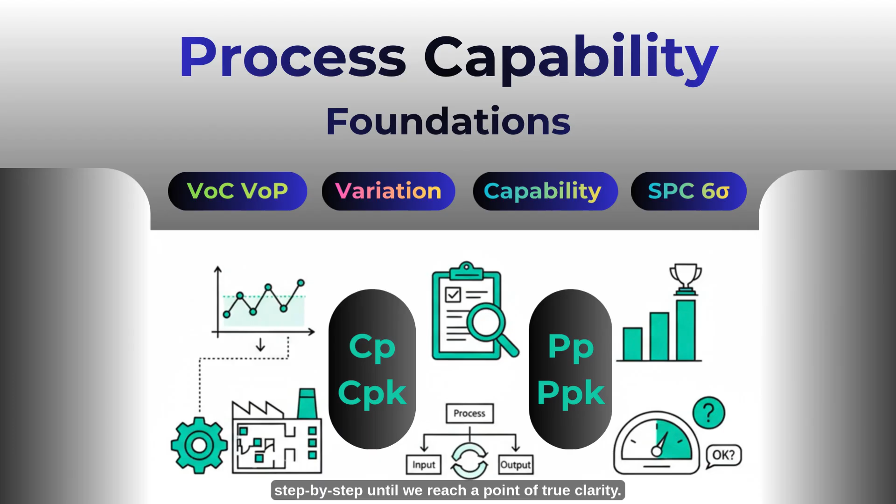This session is designed to be a deep dive, a masterclass, to give you a complete and really confident understanding of process capability. These are the tools that let us measure, understand, and ultimately master that tension. We're going to learn the language of variation and build step by step until we reach a point of true clarity.

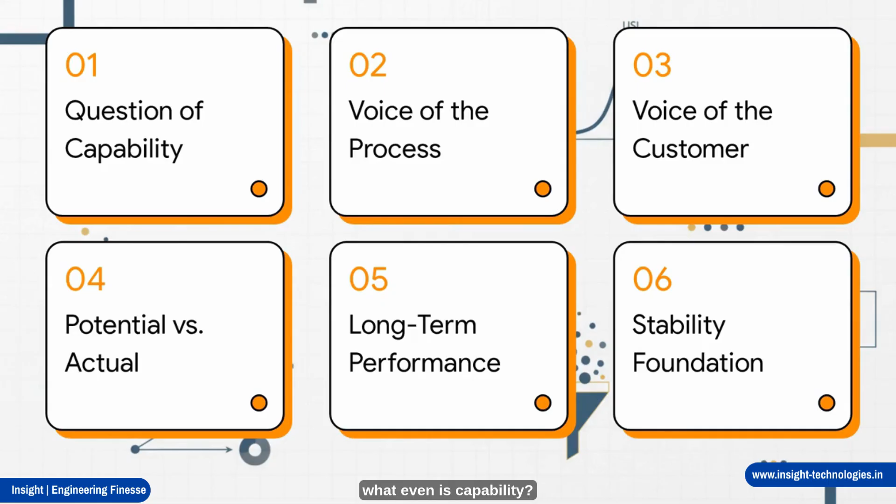Our journey today is structured pretty carefully to build your understanding from the ground up, kind of like constructing a solid building. We'll start with the most basic question: what even is capability? Then we'll introduce two essential perspectives we have to hold in our minds: the voice of the process, what our system is really telling us, and the voice of the customer, what the world is asking of us.

Only then, with that foundation in place, can we start to build on it with our key metrics. We'll learn to tell the difference between a process's potential versus what it's actually doing, and then look at its performance over the long haul. And finally, we're going to secure the whole structure by understanding the one thing that's non-negotiable, the prerequisite that makes all this analysis meaningful in the first place: process stability.

So let's start with that core question. For way too long, a lot of businesses have just run on intuition. We feel like a process is running well. We think we're meeting customer needs. But process capability analysis forces us to ask a much more rigorous, a more honest question.

Is it truly good enough? It's really a method for moving past anecdotes and opinions and into the world of actual statistical proof. It's all about replacing 'I think so' with 'I can prove it.'

Let's think about this in real terms. Whether you're talking about the weight of a cookie, the precise diameter of a screw, or even the time it takes to process an insurance claim, every single thing we produce has a target and it has an acceptable range. The fundamental challenge here is that no process is perfect. You can't produce the exact same result down to the last micron or millisecond every single time. It's just not possible. There will always be some level of natural, inherent variation.

So the critical question isn't, is there variation? Of course there is. The real question is: is the amount of variation in our process small enough to consistently stay inside the boundaries of what our customer expects? This is the exact question that process capability was invented to answer.

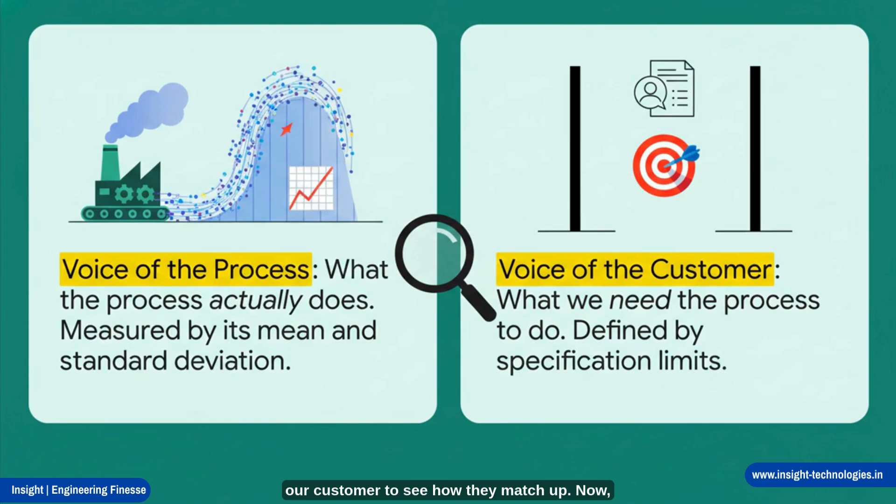Now, it's really tempting to start with what the customer wants, but that's actually a mistake. We have to begin by understanding our own process first. Before we can judge our performance against any external standard, we have to listen really carefully to what the data is telling us. We've got to understand the natural behavior, the inherent rhythm and consistency, or maybe the inconsistency, of what we are doing. This is our first foundational block.

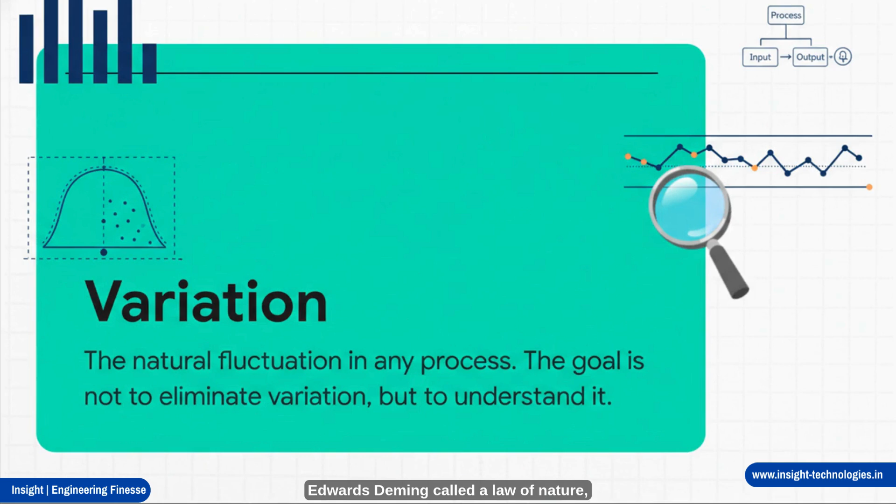The very first thing we just have to accept is what the great quality pioneer W. Edwards Deming called a law of nature: the universal existence of variation. No matter how controlled we think a process is, no two outputs will ever be perfectly, absolutely identical. There will always be tiny, unavoidable fluctuations caused by a million little factors. So our mission isn't the impossible task of eliminating all variation.

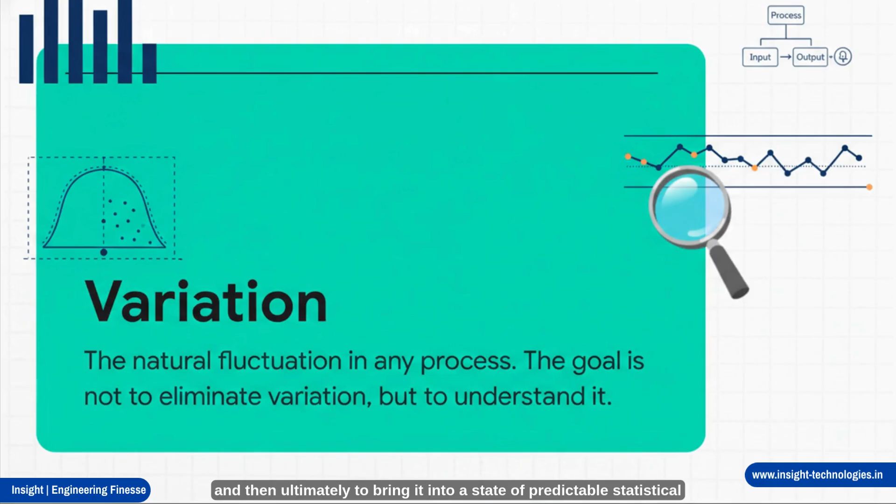No, our mission is to understand its nature and its size, to measure it, and then ultimately to bring it into a state of predictable statistical control, where that variation is consistent and stable over time.

Okay, so if we need to measure this cloud of variation, what language do we use? Well, that language is the standard deviation, often shown by the Greek letter sigma. Now, don't let the name throw you. Conceptually, standard deviation is just a measure of the average distance of each data point from the process average.

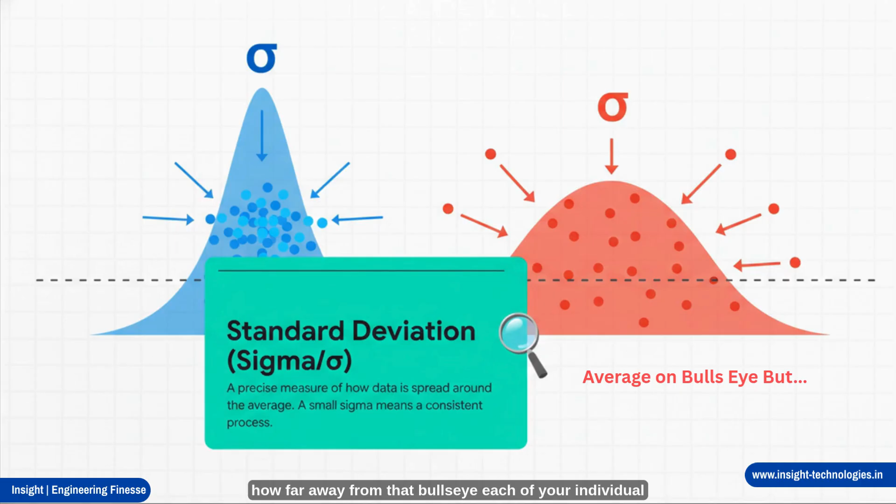Imagine you're throwing darts at a dartboard. The average of all your throws might be right on the bullseye, but the standard deviation tells you, on average, how far away from that bullseye each of your individual darts landed. A small standard deviation, a small sigma, means all your darts are tightly clustered together. That's a consistent, predictable process. A large sigma tells us our darts are scattered all over the board. Our process is wide, it's inconsistent, and it creates a huge range of outcomes.

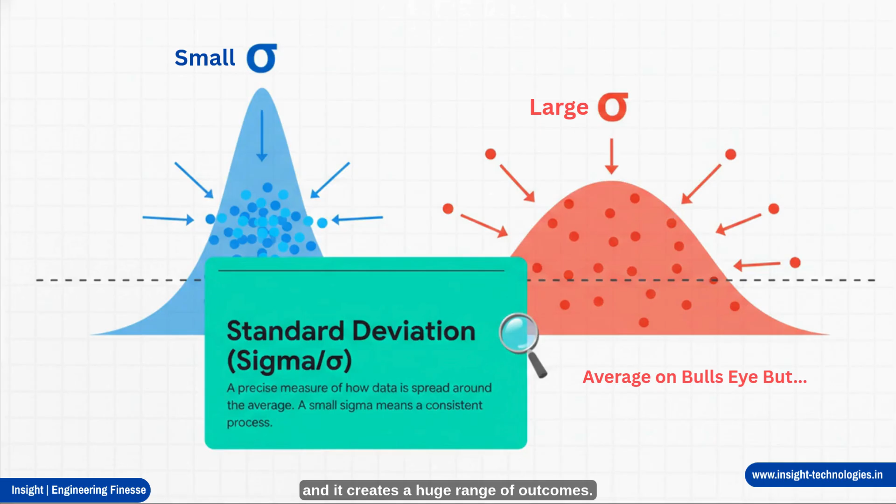Sigma is the single most important number for quantifying the voice of the process. And here is where sigma becomes incredibly powerful. When a process is stable, its output often follows this predictable pattern that we call the normal distribution, that classic bell-shaped curve you see here. The very peak of the curve is our process average, and with sigma, we can make remarkably accurate predictions about this process without having to measure every single item.

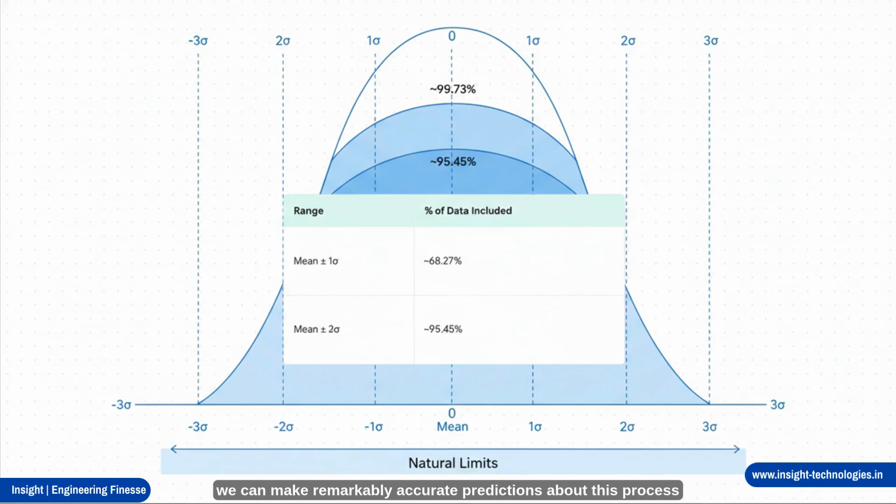We know, as you can see in that first shaded area, that roughly 68% of everything we produce is going to fall within one standard deviation on either side of our average. If we widen our view out to 2 standard deviations, that now contains about 95.5% of our output. And if we go all the way out to 3 standard deviations on each side, we capture a full 99.73% of everything our process makes.

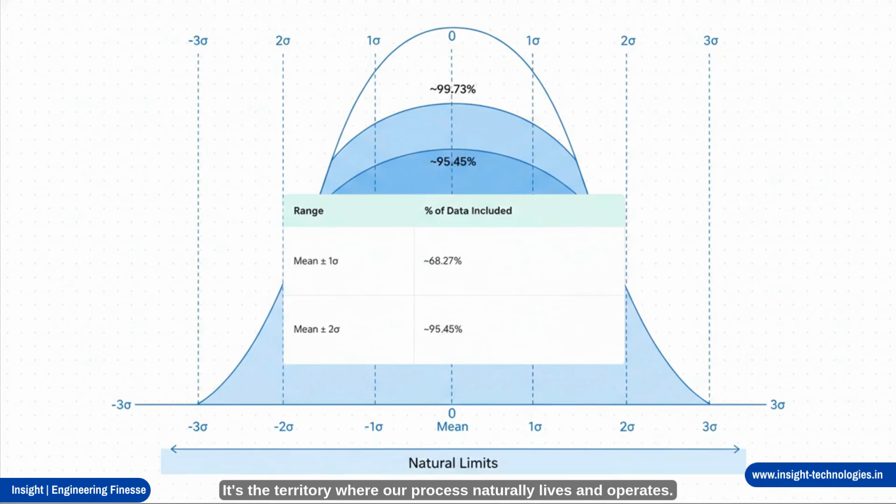This 6 sigma spread, from -3 sigma all the way to +3 sigma, effectively defines the natural footprint of our process. It's the territory where our process naturally lives and operates. We call these the process's natural limits.

All right, so we've listened carefully to the voice of the process. We understand its average, and we've measured its natural 6 sigma spread. But this knowledge just kind of exists in a vacuum. It's only half the story. Knowing our process's natural limits is pretty useless until we compare it to what the customer actually demands.

So now we have to introduce that second voice, the voice of the customer. This is what defines what success really looks like. The voice of the customer is expressed through what we call specification limits. These are the absolute, non-negotiable boundaries of what's considered acceptable performance. The upper spec limit, or USL, is the highest value the customer will tolerate. The lower spec limit, or LSL, is the lowest.

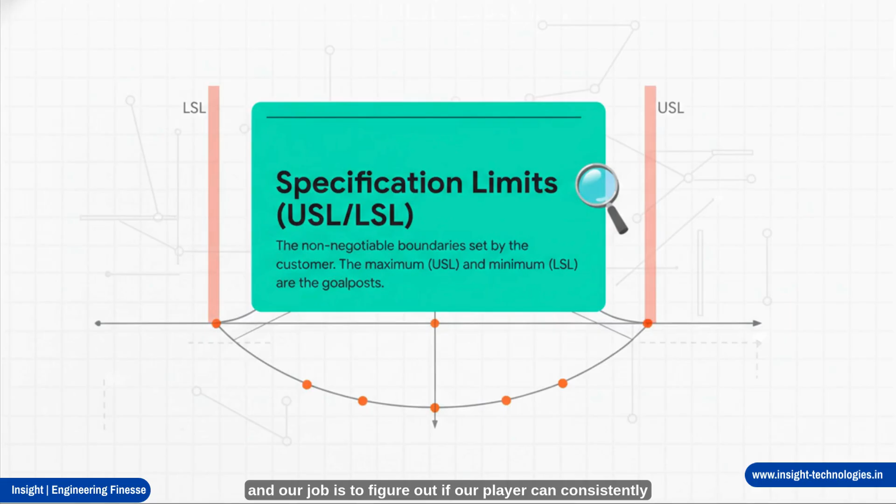It is absolutely critical to understand that these limits have nothing to do with our process, its average, or its standard deviation. They are an external requirement, a demand that's placed upon us. Think of them as the goalposts on the field. Our process is the player, and our job is to figure out if our player can consistently kick the ball between those posts. And so the moment has finally arrived.

We have our 2 voices, the voice of the process, our bell curve with its natural spread, and the voice of the customer, our goalposts, our specification limits. It's time to bring them together on the same chart. This is where we introduce the 2 most fundamental indices of process capability, Cp and Cpk. These metrics help us distinguish between what a process could theoretically do versus what it's actually delivering right this minute.

To make this whole subject really intuitive and unforgettable, we're going to use a powerful analogy that we'll keep coming back to, the car and the garage. I want you to imagine that the width of the garage opening represents your specification width, that's the distance between your lower and upper spec limits. Now, imagine that the total width of your car represents your process spread, that 6 sigma range we just talked about. The entire question of process capability can now be framed very simply. Can you park this car in this garage without scraping the sides?

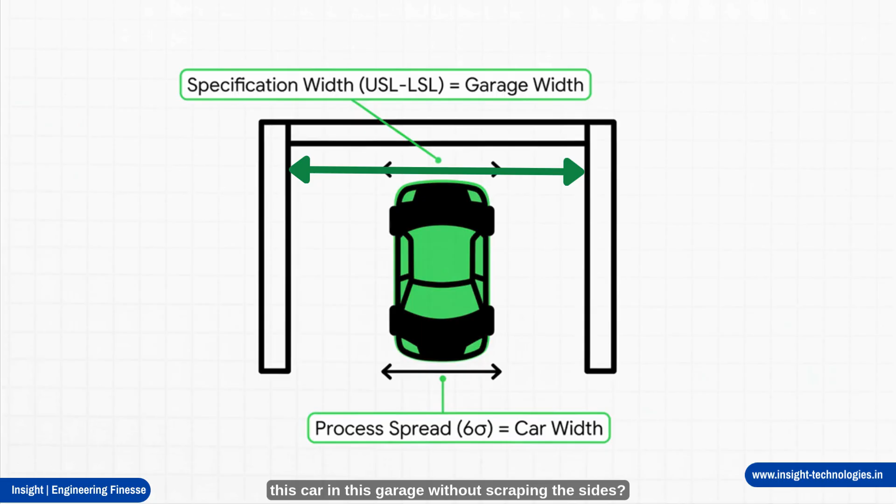Okay, our first index, Cp, measures potential capability. It answers the simplest possible version of our question. Is the car fundamentally smaller than the garage? That's it.

Conceptually, the formula is just the garage width divided by the car width. Mathematically, that's our specification width, USL minus LSL, divided by our process width, 6 times sigma.

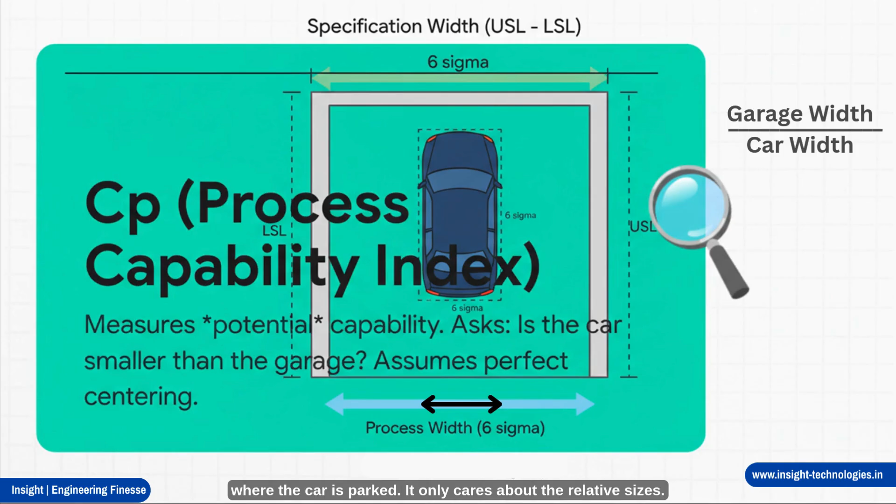Now, the crucial thing to understand about Cp is that it completely ignores where the car is parked. It only cares about the relative sizes. It makes this bold, optimistic assumption.

For just a moment, let's pretend we could perfectly center our process. If we could, would it fit? This illustrates perfectly the core difference between our two main indices. Cp asks this idealistic question about potential: if everything were perfectly lined up, could this process meet the requirements?

Cpk, on the other hand, asks the realistic, practical question: given where our process average is right now, is it actually meeting the requirements? It's not just about if the car fits. It's about whether the car is parked safely inside the garage, far away from either wall.

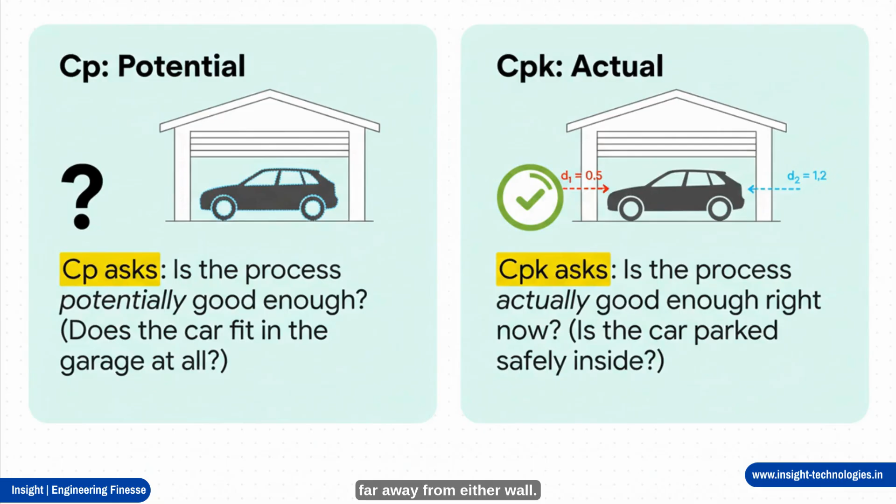So how does Cpk measure this real-world capability? Well, its logic is both simple and really profound. It recognizes that your true capability is only as good as your closest approach to failure. It doesn't matter if you have miles of room on one side of your car if you're scraping the paint on the other.

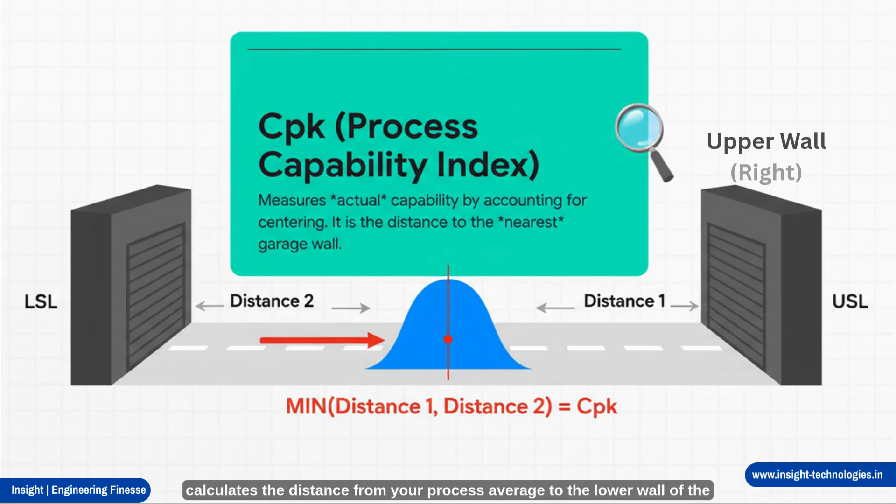So Cpk looks at two distances. First, it calculates the distance from your process average to the upper wall of the garage, that's the USL. Then it calculates the distance from your process average to the lower wall of the garage, the LSL. It measures both of these distances in units of 3 sigma. And then, this is the key, it takes the minimum of those two values.

Your Cpk is brutally honest. It's defined by your shortest distance to a garage wall.

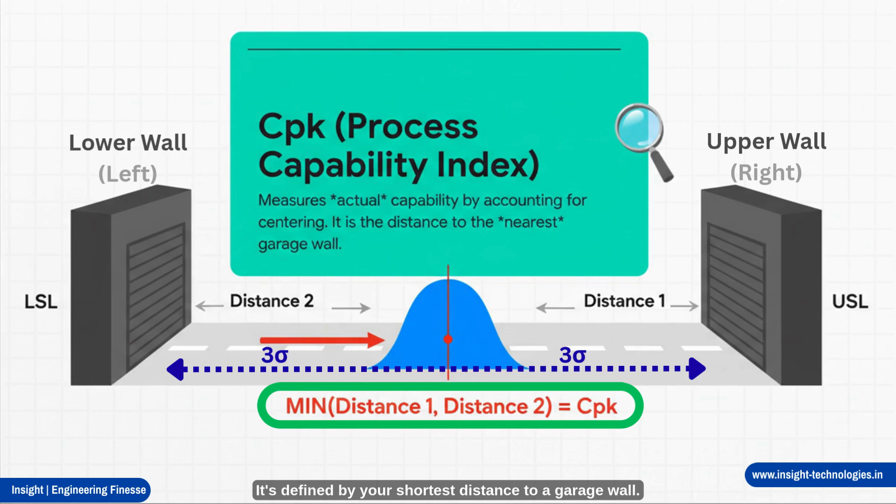Let's make this totally concrete with our first numerical example. Imagine we're baking cookies. The customer says the weight has to be between 14 grams, our LSL, and 16 grams, our USL. We've collected some data and calculated that our process standard deviation, our sigma, is 0.24 grams.

First, let's calculate Cp, our potential capability. The formula, remember, is garage width divided by car width. So what's our garage width? It's the USL minus the LSL: 16 minus 14, which is 2 grams. That's the customer's total tolerance.

What's our car width? That's our 6 sigma process spread: 6 times 0.24 grams, which is 1.44 grams. So our car is 1.44 grams wide, and our garage is 2 grams wide. So Cp is 2 divided by 1.44, which gives us a result of 1.39.

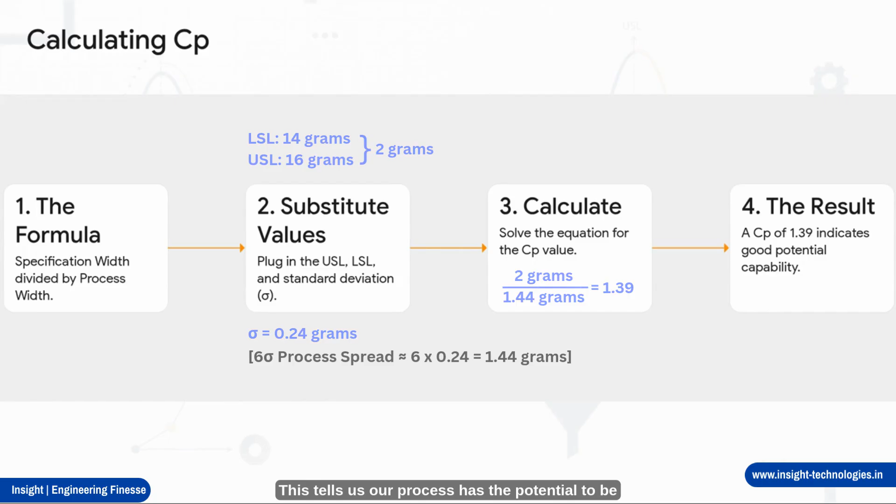This tells us our process has the potential to be very capable. The car definitely fits in the garage. But now for the real test, calculating the actual capability, Cpk.

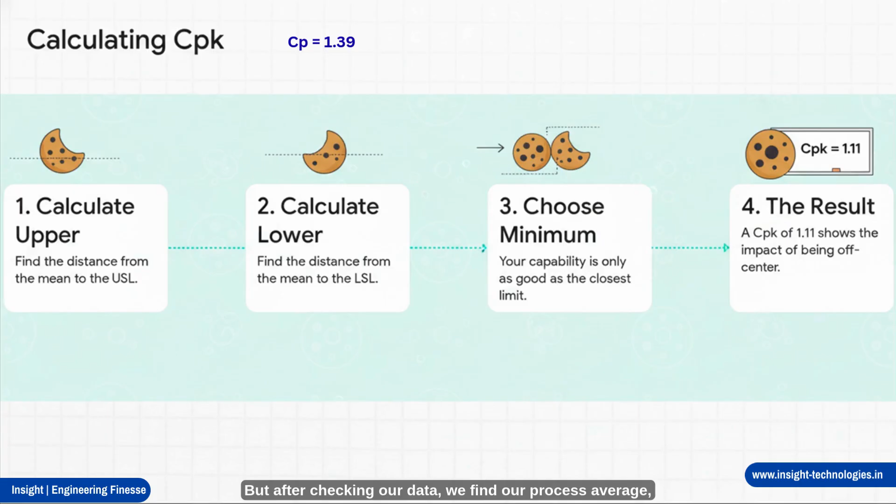Our cookie process has a potential Cp of 1.39, which is great. But after checking our data, we find our process average, our mean, is actually 15.2 grams. It's not perfectly centered at 15. It's shifted a bit towards the upper limit. This means we're parked closer to one garage wall than the other.

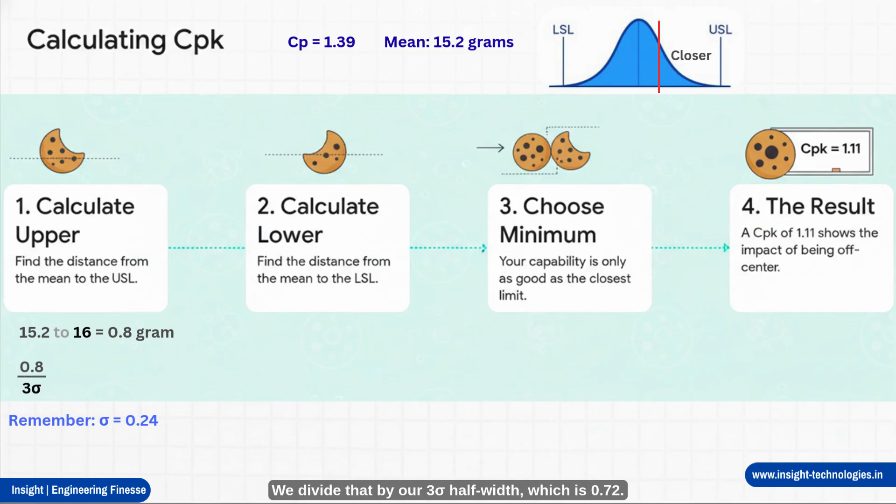So now we have to calculate the distance to both walls. Let's look at the upper side first. The distance from our mean, 15.2, to the USL, 16, is 0.8 grams. We divide that by our 3 sigma half width, which is 0.72. That gives us an upper capability of 1.11.

Now for the lower side. The distance from our mean, 15.2, down to the LSL, 14, is 1.2 grams. We divide that by the same 3 sigma value of 0.72, which gives us a lower capability of 1.67. Cpk is the minimum of these two. It's that shortest distance to danger, so our Cpk is 1.11.

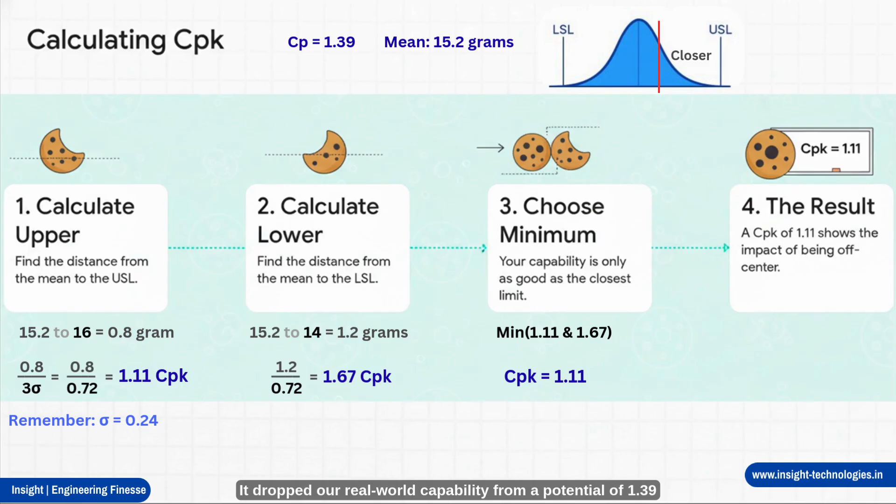You see how being off-center penalized our score? It dropped our real-world capability from a potential of 1.39 all the way down to an actual of 1.11.

So what do these numbers actually mean in the real world? Well, this table gives us some common benchmarks. A Cpk value less than 1.0 is a clear danger signal. It means your car is wider than the garage, or you're so off-center you're already hitting the wall. You are definitely making defects.

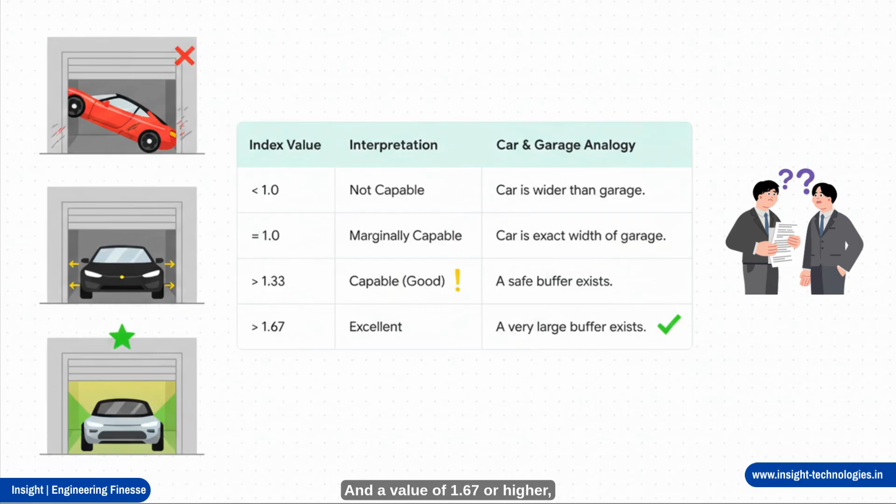A value of exactly 1.0 means the car is the exact same width as the garage, and you're perfectly centered. Any slight shift is going to cause problems. This is why many industries consider a value of 1.33 to be the minimum acceptable standard for a capable process. This gives you a safe buffer on both sides. And a value of 1.67 or higher, that's considered excellent or world-class.

It represents a process with a really large safety margin, and it corresponds to what's known as a five sigma level of quality. Okay, we've now mastered the core concepts of Cp and Cpk.

These are incredibly powerful tools, but they're based on a kind of snapshot view of our process. What happens over the long haul? Over weeks and months, with different shifts, different batches of raw material, gradual tool wear? To answer that, we need to add another layer of sophistication. We have to distinguish between short-term capability, which we've been talking about, and long-term real-world performance. And this brings us to a new parallel set of indices, Pp and Ppk.

The entire difference between the C indices like Cpk and the P indices like Ppk comes down to one single thing: how we calculate the standard deviation. For Cp and Cpk, we use a short-term estimate of sigma. Think of this as a snapshot. It's calculated by taking small samples of data close together in time. We call these rational subgroups. This method is designed to only capture the inherent common cause variation of the process when it's running at its absolute best. It represents the process potential.

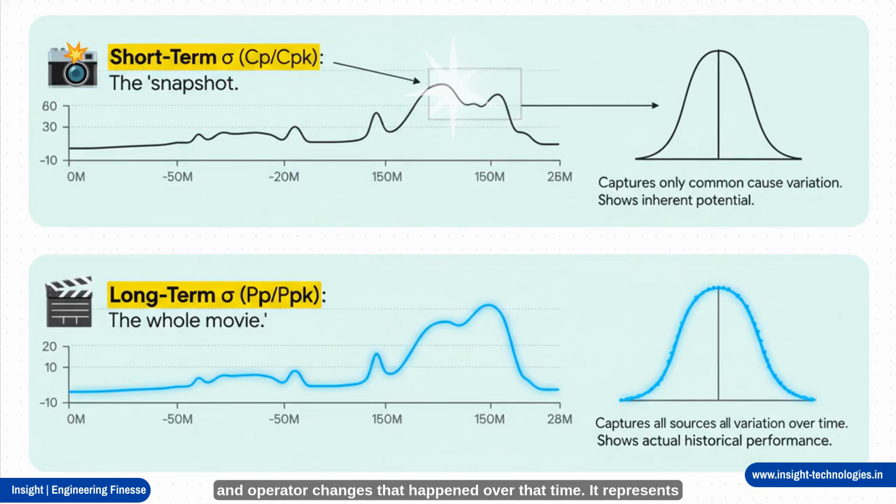For Pp and Ppk, however, we use the long-term overall standard deviation. This is the whole movie. We just throw all the data from a long period into one big bucket and calculate sigma. This captures everything, all the short-term variation, plus any shifts, drifts, tool wear, and operator changes that happened over that time. It represents the actual historical performance of the process, warts and all.

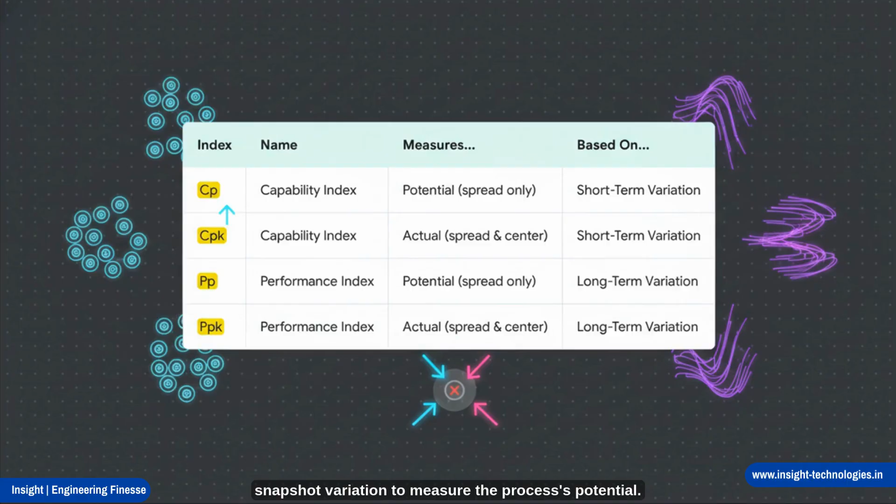We have two families of indices, each with two members. The capability family, Cp and Cpk, uses that short-term, snapshot variation to measure the process's potential. Cp looks only at the spread, while Cpk also considers the centering. The performance family, Pp and Ppk, uses that long-term, whole movie variation to measure actual historical performance. Pp looks only at the spread, while Ppk also considers centering.

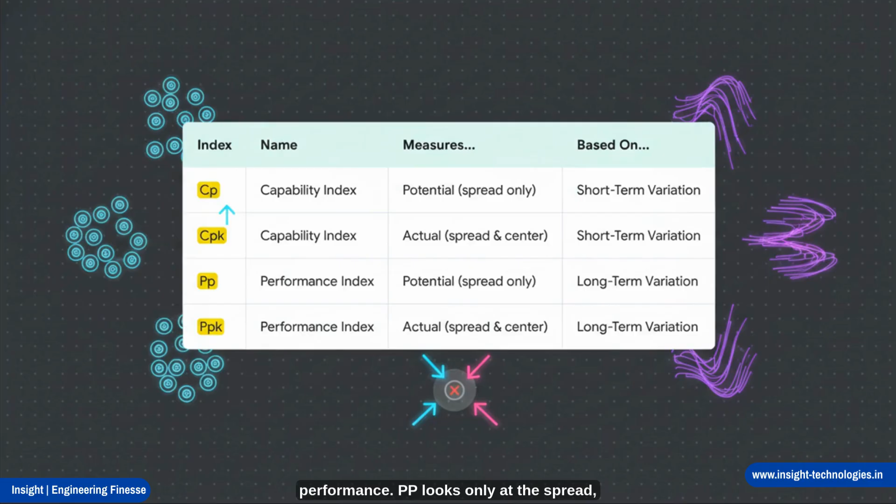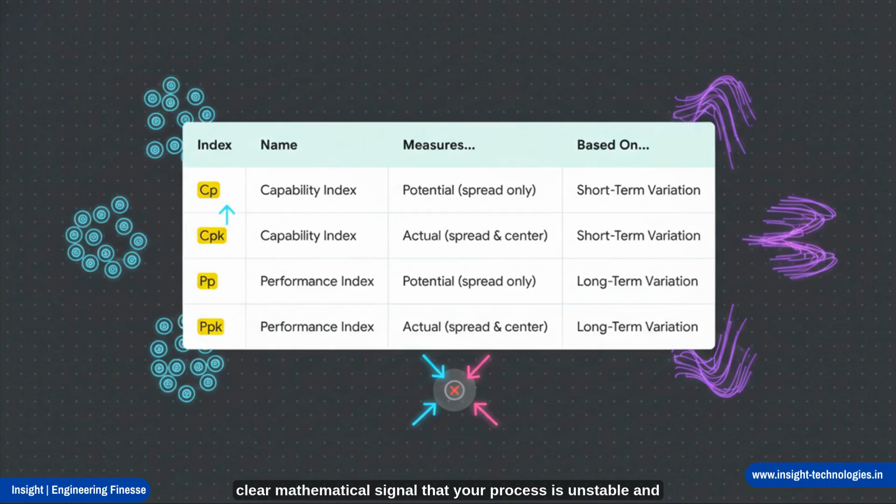And here's the key insight. In a perfectly stable process, the short-term and long-term variation will be almost identical, which means your Cpk and Ppk values are going to be very close. A large gap between your Cpk and your Ppk is a clear mathematical signal that your process is unstable and has significant drifts or shifts happening over time.

And this brings us to our final and maybe the most important topic of this whole masterclass. We've learned how to calculate these powerful indices that tell us so much about our process. But there is a critical, absolutely non-negotiable prerequisite that has to be met before any of these numbers, Cp, Cpk, Pp, or Ppk, have any real meaning at all. And that prerequisite is process stability. Without it, these calculations aren't just useless, they can be dangerously misleading.

So let's be perfectly clear. Stability and capability are not the same thing. They're two different questions. A process is stable if it's in a state of statistical control. This just means its variation is predictable and consistent over time, coming only from common inherent causes. We use tools like control charts to verify this. Stability is the foundation. It is the prerequisite. Only once a process is proven to be stable can we meaningfully ask the second question: is it capable?

A capable process is one that meets customer specifications. Its bell curve fits inside the goalposts. Capability is the goal. Trying to measure the capability of an unstable process is like trying to measure the width of a car while it's swerving wildly across three lanes of traffic. The number you get is meaningless because it's going to be different again in the next moment. You have to first stabilize the process. Get the car driving straight in one lane, and only then can you truly and reliably measure its capability.